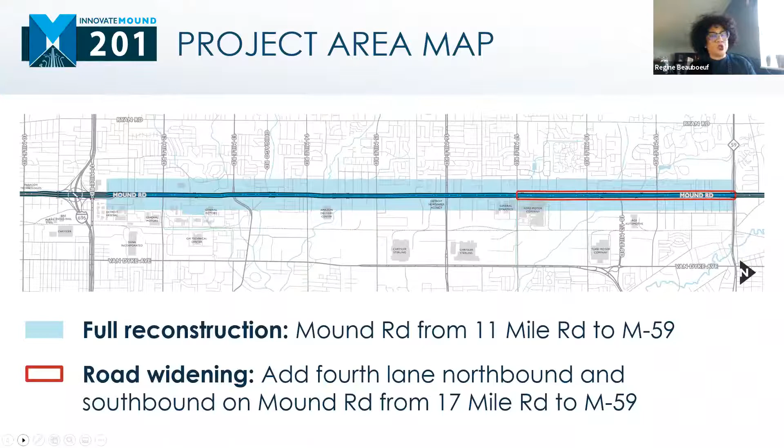We are looking at the reconstruction of Mound Road from 11 Mile Road to M59 to the north. That's approximately 9 miles of reconstructed pavement. We are also widening from 17 Mile Road to M59 to have a consistent 4-lane facility on each side, northbound and southbound, from the project's southern terminus to its northern one. As a result, the outcome of the project will be not just reconstructed smooth pavement, but also improved safety and increased traffic flow so you experience less congestion as you travel the roadway.

You're going to experience a more pleasant facility because of the landscaping we will be adding to the project, and making the lighting consistent - currently on Mound Road it's sometimes on both sides, sometimes in the median. We are going to present a unified, consistent lighting in the median from south to north. We want to make sure we not only address the concerns of vehicular traffic, but that Mound Road is also a safe and friendly facility for pedestrians and other users. We've also improved accessibility to the transit system around Mound Road, located on the crossroads and also on Van Dyke, a mile over to the east side. As Brian mentioned, we're also talking about the innovative mobility features we've added to the project, which you'll see in more detail as we move into the presentation.

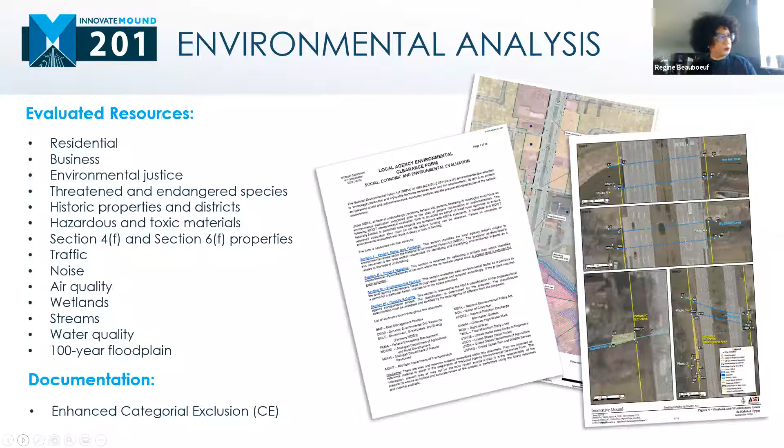Next, you heard me mention access management earlier. What is access management? Mound Road is a free access roadway, not like a freeway where access is controlled only at specific locations. Over the years, land use around Mound Road has evolved, changing based on population, demands, and the needs of the community. What was built 40 years ago for the traffic and land use at the time isn't quite working as it was meant to.

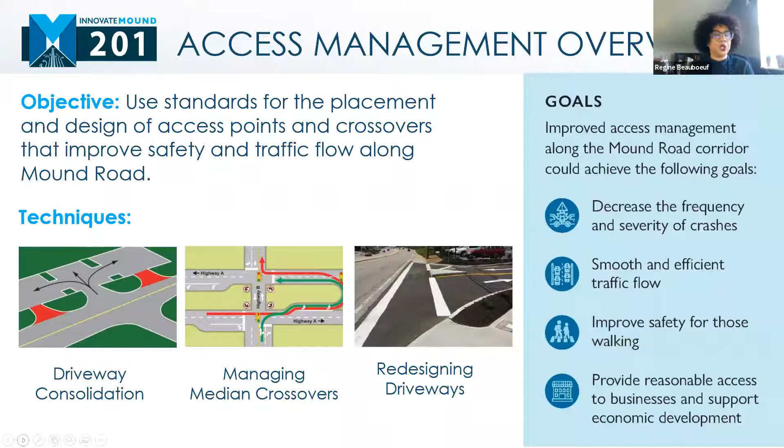With more driveways, crossovers are now located in areas where they conflict with driveway movements, people entering or exiting, increasing the potential for incidents and resulting congestion. On Mound Road, we identified the areas where users were experiencing the largest number of crashes. We looked at intersection delays at the traffic lights, how long it takes for traffic to clear, and were able to identify the hotspots along the corridor.

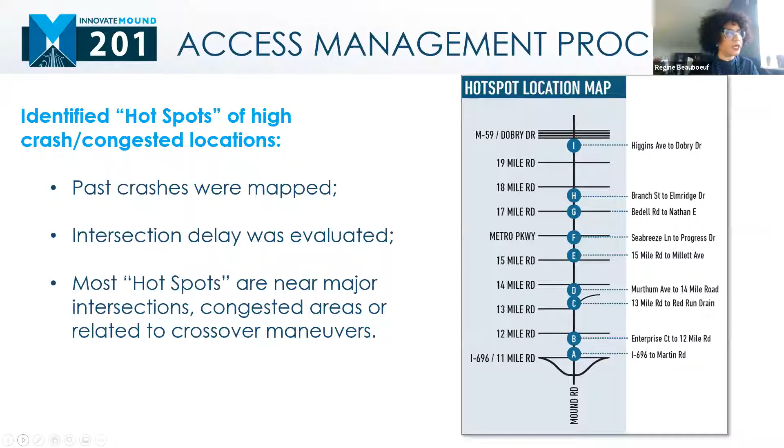We also looked at driveway issues. Very often there are multiple driveways built next to each other, and we tried, as much as possible, to consolidate them into a single entrance, reducing the potential for rear-end collisions. We also looked at driveway geometrics, since many were built years ago before large trucks were turning into them, so we're updating and modernizing those accesses to build them to standard.

Finally, we looked at crossover locations. When we mentioned Heathdale earlier, the problem was that people had to cross over practically 5 lanes of traffic and then 4 more lanes to enter, because the crossover was located right there. By moving it further south, we gave people more time to cross over safely and merge back onto the northbound lanes. That's one example, and there's another similar case north of 18 Mile Road where we also relocated a crossover, resulting in fewer incidents on the roadway.

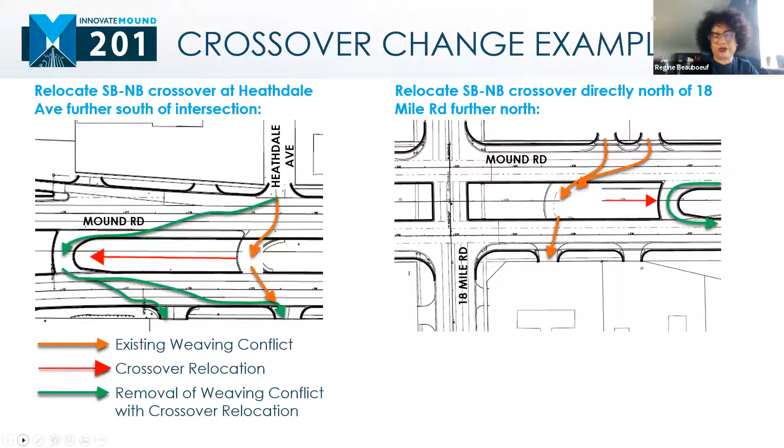So we mentioned earlier that one of the main exercises we've also done was to look at not just how poor the pavement is, but also how traffic is really moving, flowing on Mound Road, and how with the expecting population growth occurring in Macomb County, how is Mound Road going to be able to continue to serve the public adequately.

So we looked at what we call the level of service. The level of service is a way that quantitatively and objectively we can measure how long it takes you to cross or travel a roadway and how long you stay at an intersection. That determines whether you have excellent level of service, which is A, or really poor level of service, which is F.

Most of the time you will really be between B and E and F, but this is a way that tells us if we proposed improvements on the roadway, we can measure if what we're proposing to do actually is effective and efficient at solving the problem.

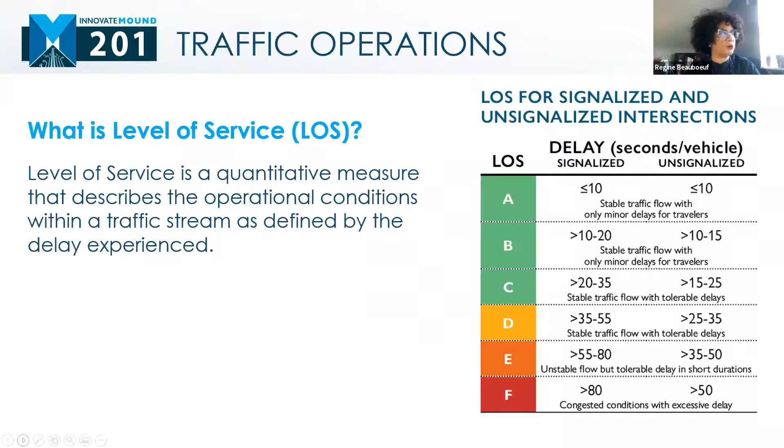So what we've done is take a look at Mound Road itself. We determined first how does the facility work today, because everything is based on comparison, you have to have a benchmark. In 2019, when you're traveling Mound, what does it feel like to travel it in the morning hours, during the commute time? That's what we call the peak period, the peak hour.

The peak period in the morning on Mound Road goes from 6:15 to 9:15. That means that's when you have the most traffic, the most congestion on Mound Road. The peak hour is probably just one hour within that, the one in the middle, we took it 7:15 to 8:15, but this is what it means.

And so we've observed those areas that were really congested. We've done the same exercise for the afternoon peak, which is when commuting people are coming, going back home or leaving work, etc. So we've identified those areas that were problem areas, like the 3 lanes in each direction between 17 Mile and M59.

So it reinforced that adding a 4th lane onto, it wasn't just enough to reconstruct the 3 lanes north of 17 Mile, but we also needed to widen it.

And so at the bottom of the slide, what you will see is how long it takes us to go, on the northbound, if you're traveling north, from Stephens Road, which is just north of 9 Mile Road, to West Utica Road, which is just north of M59. So in the morning, it takes about 17 and a half minutes.

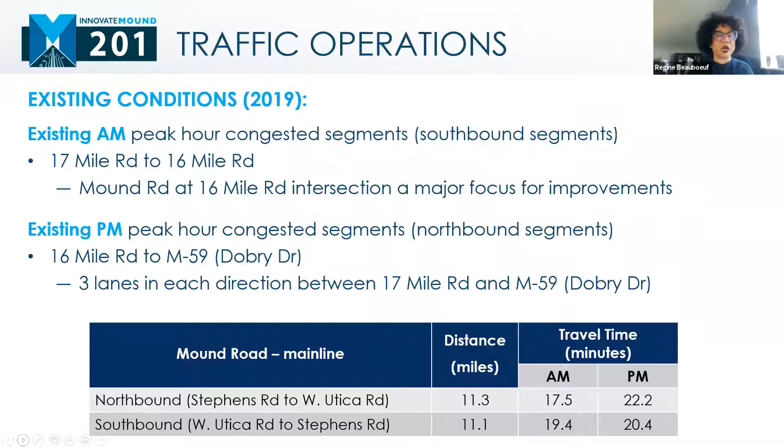So now let's see, if we do nothing, we leave Mound Road as it is, let's see what happens in 2050. Because this type of improvement, of investment, needs to last us at least until 2050. So let's take a look and really compare.

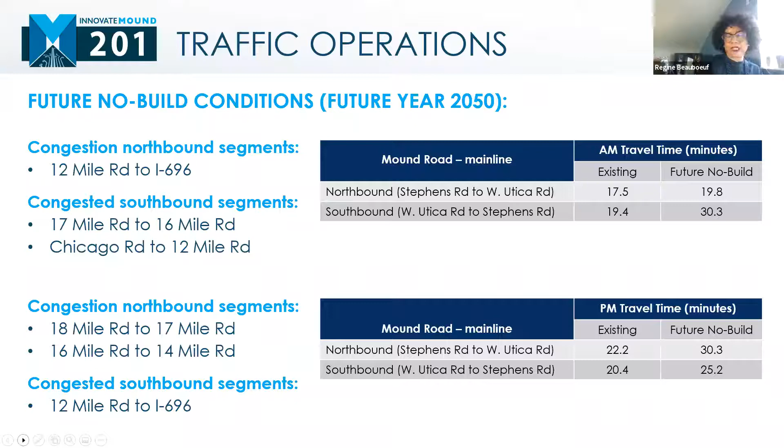So now, having identified those areas that you see on the left as problem areas, we went back and proposed solutions. As part of the solutions, we have new traffic signal technology that improves, we optimize the signal so that the coordination and progression of traffic flows better with less interruptions. We also signalize some crossovers on 16 Mile, which are actually outside of Mound Road, but we realized you cannot treat Mound Road as a separate system. It also works along with, in close proximity with those 500, 600 feet on each side of the major Mile Road, so we realized there was something to be done there.

We've added the 4th lane. We've relocated and consolidated some crossovers to improve that.

So what does happen? What you see on the right side is what happens with the existing. Today we have 17 and a half. If we do nothing, then we're talking about 19.8. And then if we build better, if we reconstruct better, we're able to shave off some minutes, that's in the AM. But if you look at the southbound, and then also the afternoon peak, afternoon commute traffic, you see that there's significant time shaved off, that time it takes to travel.

So that's part of what we want to do. Yes, we could shave more time if we added more lanes, more capacity, or closed off access, but that wasn't the point of the project. The project was to optimize the space we had, the existing footprint and right-of-way already owned by the county, to bring it up to something much better that would work until 2050.

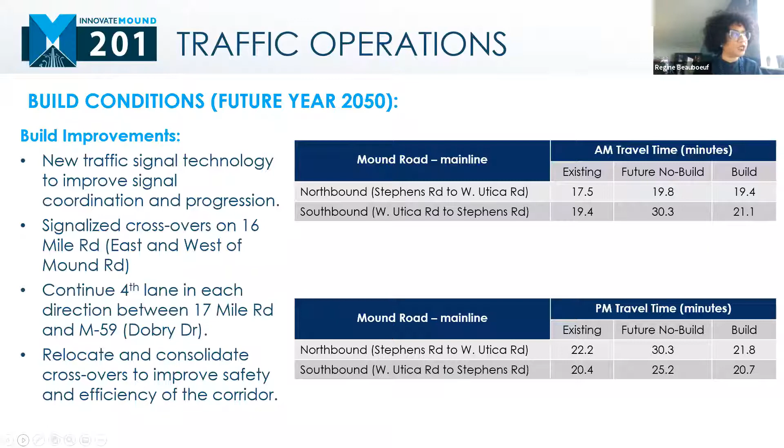So that gives you an idea of where we are. We talked a little about the cars and trucks traveling the roadway, and I'm sure the manufacturing world will be happy to know their trucks will be able to travel and arrive on time at their facilities.

Now let's talk about what happens for pedestrians. How did we improve safety and access for them? During our field review to assess existing conditions, when we walked Mound Road, we realized there were a lot of trails. People had been walking, especially on the west side, even though there were no sidewalks—the grass was gone, which tells us people are using that west side.

The reason being that behind that wall of commercial establishments, there are residential neighborhoods on the west side. People are walking because sometimes they get off the bus or want to access Mound Road to go to restaurants or commercial businesses. And so they're walking that, so as a result, we determined...

Building a continuous sidewalk system from north to south on the west side of Mound was a major improvement for pedestrian traffic. That's really one of the things we proposed, and we got some feedback as well during that time. So then what else did we do?

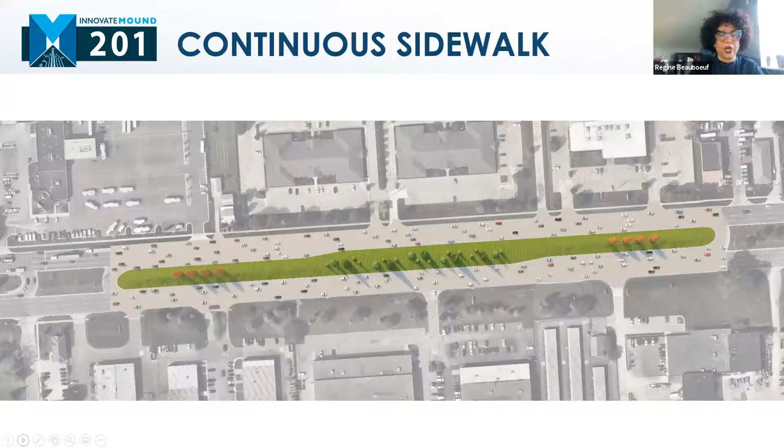We also looked at how easy it is to cross Mound Road, and realized there were improvements needed to allow pedestrians and other users to feel comfortable walking across. So we enhanced signals with pedestrian push buttons, and we highlighted the crossing areas to make it safer and more visible to cars, pedestrians, and other users.

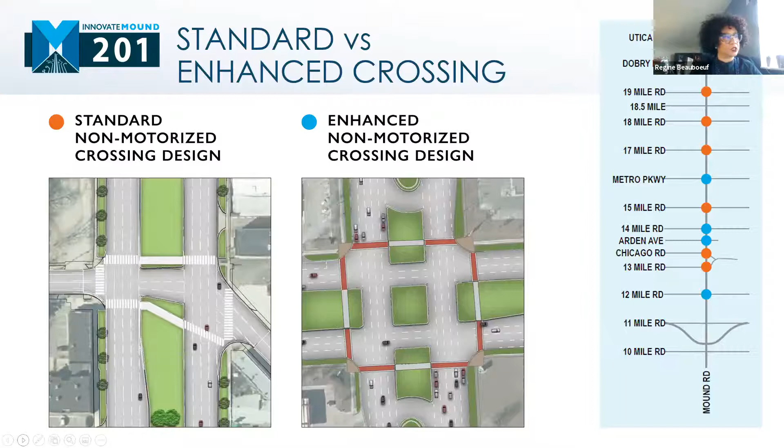But the landscape and aesthetic treatment you've seen doesn't just end at the intersections where people are crossing. We've developed a plan to make the entire facility more pleasant. We also know that where people stop and cross, they have more chance to sit, look around, and enjoy the view.

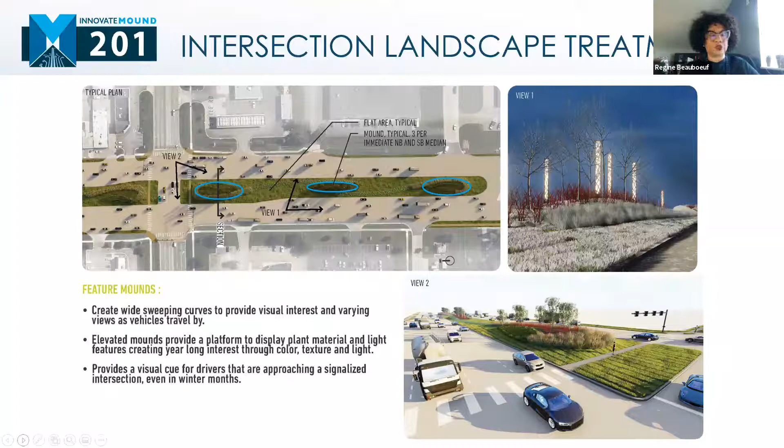So we talked about iconic earlier—Mr. Sento described iconic signs. What you see here is that at some intersections, we have iconic lights along the roadway, and we've also proposed landscaping with different vegetation. We wanted to capture this, and on the next slide you'll see it better—we're trying to keep Mound Road colorful and green at all times. You'll see plants that are colorful in fall time, adding to its beauty, and plenty of evergreens to ensure green along the roadway. That's what you see here in terms of landscape.

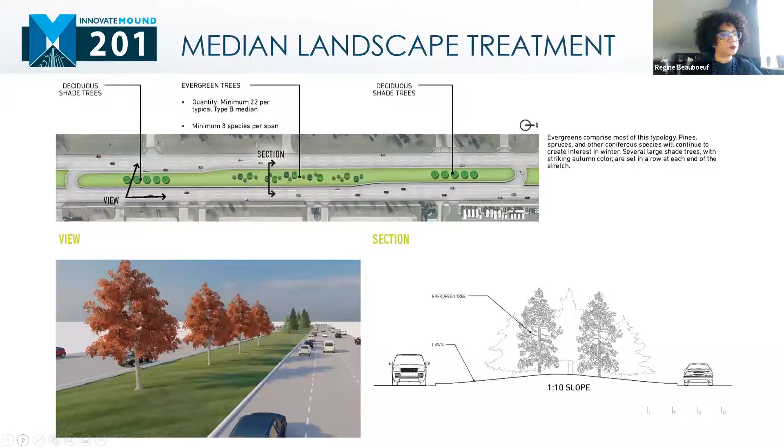And so I want to also focus your attention on the historic village of Warren. This is a very unique spot along Mound Road because it sits in a historic village, and what we want to do is develop a plan that meets the aesthetic needs and is context sensitive.

Like I say, we wanted to be sensitive to the context in the historic village, and so we propose a more classic landscape. You'll see two rows of plants, but one of the things you'll notice is at Arden Avenue.

What we've done here is where function meets form. We realized that between 13 Mile and 14 Mile roads there were a lot more incidents and congestion, largely due to a multitude of traffic signals that are hard to optimize so people can cross at one time. Additionally, the school system in Warren exits with buses, and south of Arden there's also St. Anne's School, and all of that together caused conflicts in traffic movements. The proximity of the signals really caused a lot of congestion in this area.

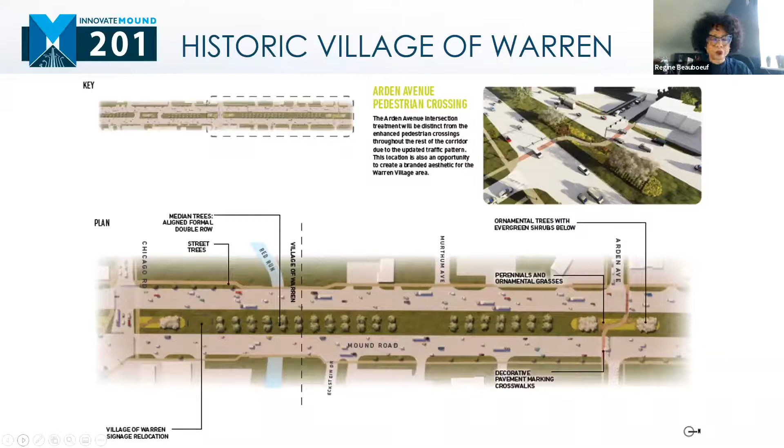Having talked about what you'll see when you travel, I'll hand it over to Steve Griffith, our deputy project manager, who will be responsible for construction of this project. He's going to describe what we've done to make sure the project is constructible and feasible from an engineering standpoint. Thank you, everyone.

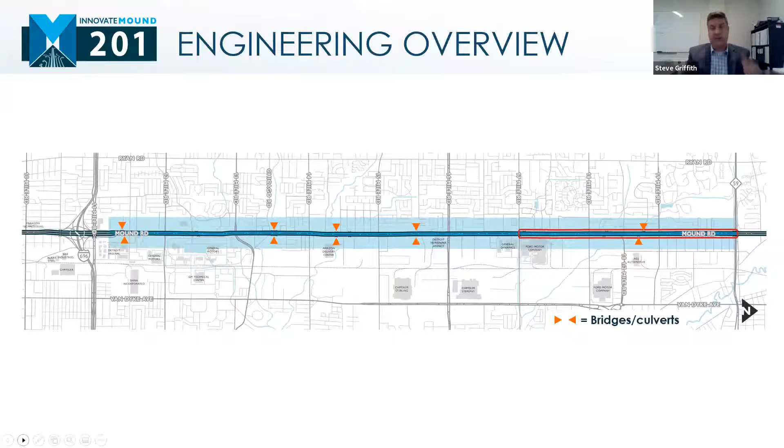So moving on, one of the first tasks we were assigned was to go out and complete project readiness, which includes the preliminary data collection activities necessary to begin development of the roadway and bridge plans.

This included detailed scoping studies of the existing roadway, as well as bridge scoping of the structures to determine the appropriate repair work necessary for each bridge. Also, we conducted a comprehensive drainage study of the entire corridor to make sure the existing storm sewer system had adequate capacity for the increased drainage area with the widening of the roadway.

One of the first tasks we completed was survey work in the corridor. We completed a LiDAR scan to develop a detailed survey of the existing roadway, which is used to develop 3D models for both the existing and final roadway conditions. We also did a comprehensive utility pickup survey, identifying utility locations in the field and providing that information to the design builder. We also did a storm sewer 3D connectivity model for the entire corridor.

So we went out in the field, opened up drain structures to find pipe inverts and shot pipe inverts throughout the corridor. That allows us to model the underground storm sewer system in a 3D environment, which will be provided to the design builder to help eliminate any potential conflicts with the design plans.

We also completed a detailed right-of-way survey of the entire corridor to identify any sidewalk easements or grading permits necessary to complete the construction of the roadway.

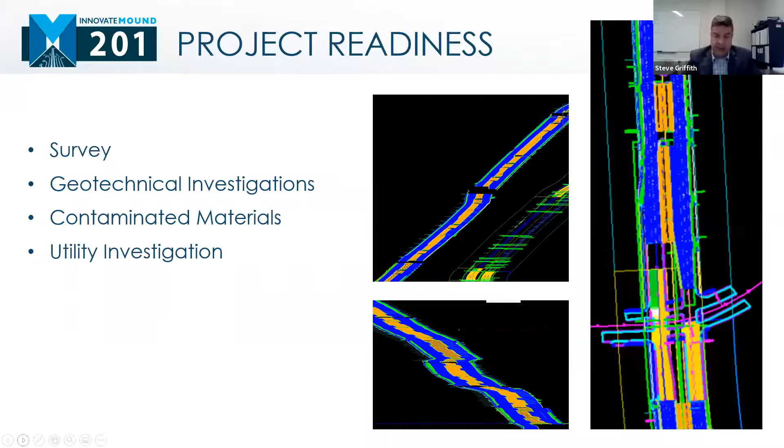So moving on, we went into the engineering of the roadway. This includes development of 30% base plans, identifying the geometric improvements along the corridor, including access management improvements and traffic operational improvements, including relocation of some of the crossovers within the corridor, also widening some turn lanes, specifically the northbound Mound Road turn lane to Metro Parkway, and then lengthening the turn lane or the right turn lane for northbound Mound at 12 Mile.

We developed a new concrete pavement and base section for the corridor, completed drainage studies for the project, identifying locations for all cross leads and drain structures to be removed and replaced in the corridor, as well as identifying repair areas for the existing trunk storm sewer that's to remain.

We completed bridge scoping for all the bridges within the corridor, as well as structure studies and hydraulic analysis for the structures being replaced or widened as part of the project. We also developed criteria for traffic signal designs, permanent signing and permanent pavement marking requirements, as well as ITS and innovative technology to be included in the project.

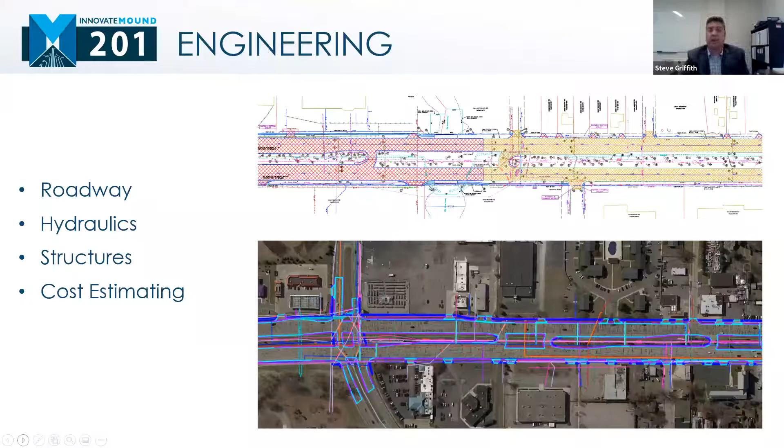The next slide shows the proposed cross-section for the roadway. You can see you have 4 lanes in each direction, giving a consistent corridor from I-696 to M-59. You also have improved median aesthetics.

There's new LED lighting in the median that's consistent throughout the corridor. The overhead utility power lines that were running parallel to Mound Road in the median are being relocated to the outside lanes, outside of Mound Road. You'll still have utility crossings overhead of Mound, but they will not be running parallel within the Mound corridor.

This section shows our new proposed high performance concrete pavement with a new open graded drainage course, base material, and a new under drain system, which will provide positive drainage for the pavement, protecting it from accelerated deterioration from the freeze-thaw cycles we experience here in Michigan.

We're also installing new storm sewer catch basins and drainage structures within the corridor, as well as new cross lead storm sewer systems. We're rehabilitating the trunk storm sewer system located in the median of Mound Road, as well as on the outside of the roadway.

On the west side of the road, you can see the new proposed 8-foot sidewalk. On the east side of the roadway, we have an existing 5-foot sidewalk. We looked at pedestrian use within the corridor, and there are certain areas where we are connecting sidewalk, but we are not replacing the entire 5-foot sidewalk on the east side of the roadway.

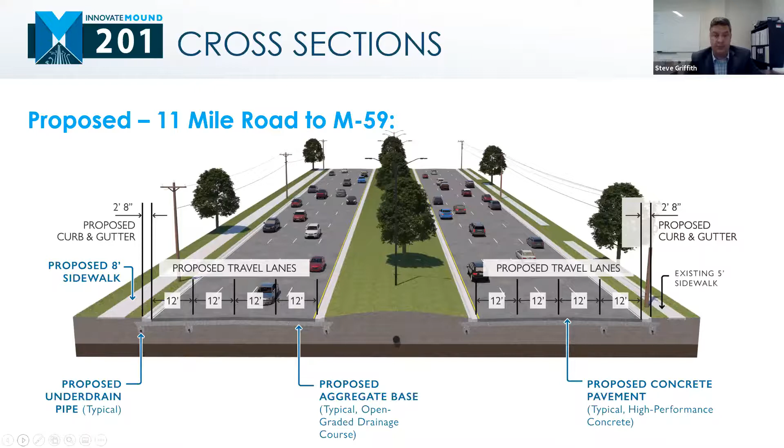Moving on to emerging mobility, one of the focuses of the corridor. The Mound Road corridor has a huge economic impact to Macomb County, and to a larger extent, all of Southeast Michigan. There are numerous technology, manufacturing, automotive, and defense contractor companies located within the corridor.

We wanted to reach out to those companies and look at developing an innovation council that looked at opportunities to implement new technologies and make the Mound Road project a national showcase. Mound Road will be a transformative corridor of the future, using innovations throughout the planning phase, as well as design, construction, and operations and maintenance.

The corridor will be enabled with a framework to serve the future of mobility and allow a test bed for emerging technologies that can improve safety and convenience in all aspects of modern life. So we looked at the whole global use of the corridor, not just focusing on roadway use, but also pedestrian access, as well as multimodal transportation.

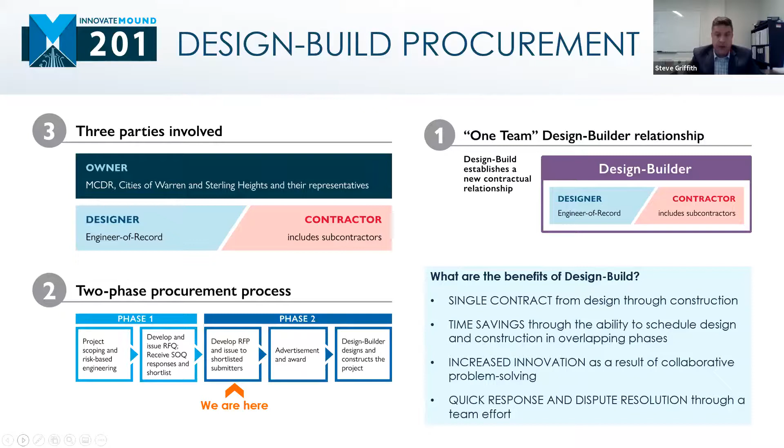So moving on, where we're at now is we have completed the selection and shortlisted the teams down to 2 teams for the design build process. We're in the process of issuing the final RFP for the design builders to begin their bid process.

So next steps, moving on, we're talking about construction and maintenance of traffic. Construction is currently scheduled to begin in the midsummer of 2021 and run through the end of 2023, with final project completion in 2024.

We've developed preliminary maintaining traffic plans that divide the project into 3 segments, where we've defined the minimum maintaining traffic requirements at all times and access requirements for the design builder to meet.

We'll also continue a focus during construction on communication. We'll have traffic advisories shared with stakeholders along the corridor, and a project dedicated website that will provide project status, lane closure information, and travel time information.

The project will also have a 24/7 dedicated ombudsman. This will be staff assigned with a cell phone they're responsible for answering 24/7. They'll be boots on the ground, able to quickly resolve any issues involving access or safety, and provide real information to anybody calling into that line.

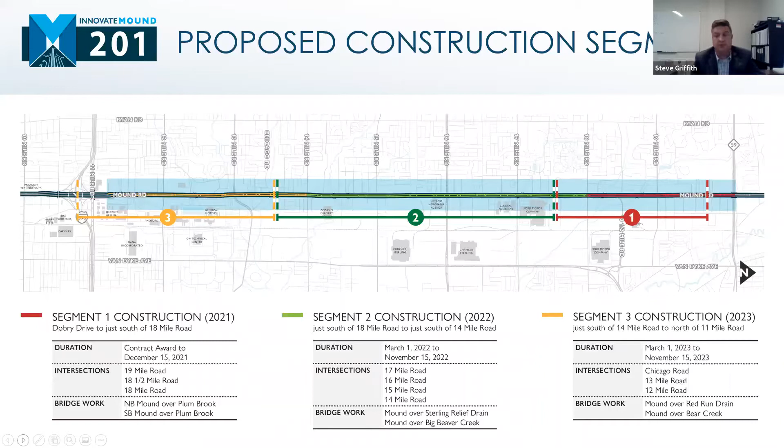Moving on, this is the proposed staging for the various construction segments. The staging is split into 3 stages for each segment, with stage 1 closing 1 to 2 lanes of the roadway, maintaining 2 through lanes of traffic in both northbound and southbound Mound on the outside roadway. This is used to begin replacement and reconstruction of the existing outside storm sewer and partial construction of the storm sewer cross leads, as well as temporary pavement widening to accommodate future maintaining traffic stages.

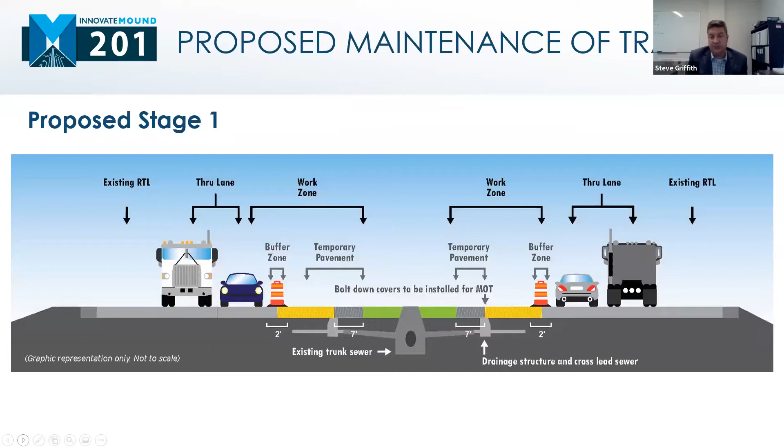In stage 2, 2 lanes of traffic in each direction will be maintained in the median area via the existing left lane as well as some temporary widening. At that point we'll reconstruct the outside lanes of traffic and complete construction of the new storm sewer system. We'll also maintain access during construction to all businesses and side streets, either via part width construction or working closely with business owners with multiple driveways to coordinate closures and construction of new driveways and access points within the corridor. We'll also be installing sidewalks at this time and beginning construction of new traffic signals and mast arms.

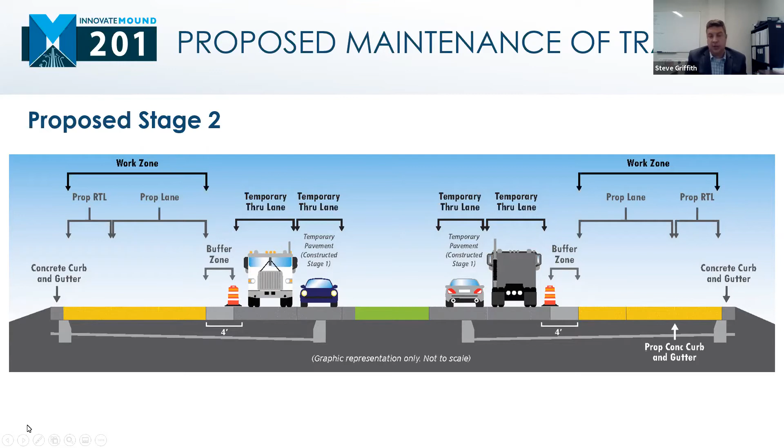In stage 3, traffic will be placed on the new concrete pavement on the outside lanes while we close the inside 2 lanes to reconstruct those inside lanes as well as the median crossovers. During construction, some median crossovers will be closed. However, there will be a minimum of one crossover per direction per mile between all mile roads - one northbound to southbound crossover maintained, and one southbound to northbound crossover maintained, with at least one, no more than 1 mile spacing between all mile roadways.

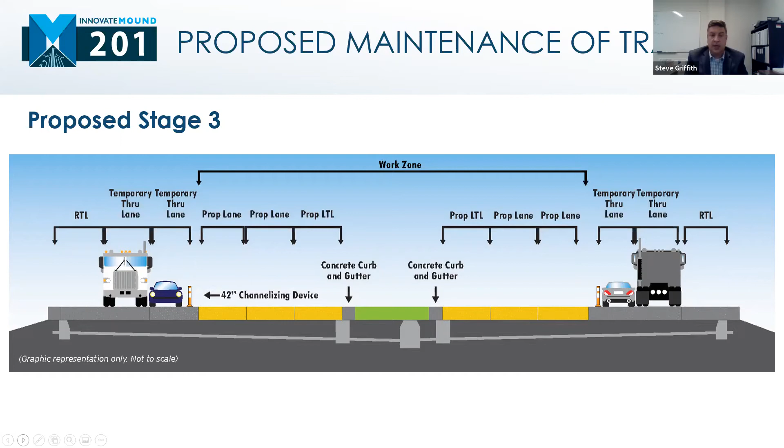So that runs through the proposed construction staging. With that, I'll turn it over to Nate Ford to go over some of the contact information, ways to reach us, as well as open it up for Q&A.